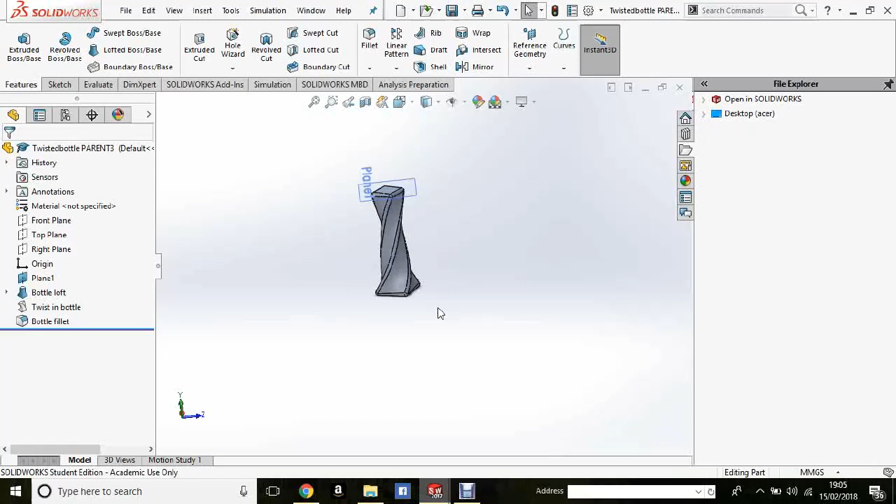Hello guys, and welcome to part 2 of the twisted bottle. So where we left off was lofting the whole bottle shape, twisting it with a flex, and then filleting all of the edges. So we're now going to move on to doming.

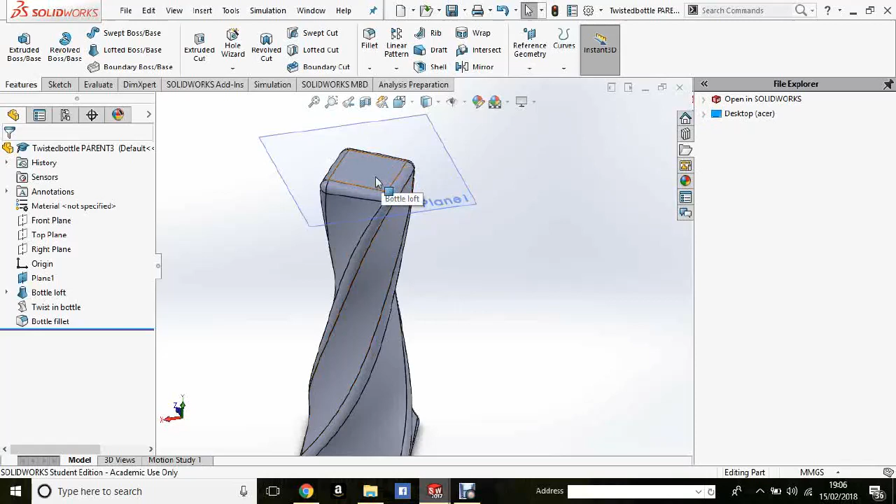This is another new feature that you guys will be learning. Doming is essentially in the features tool, but we'll have to insert it. So if we go insert, features, and dome. We can dome two ways. First of all, we need to select the parameters.

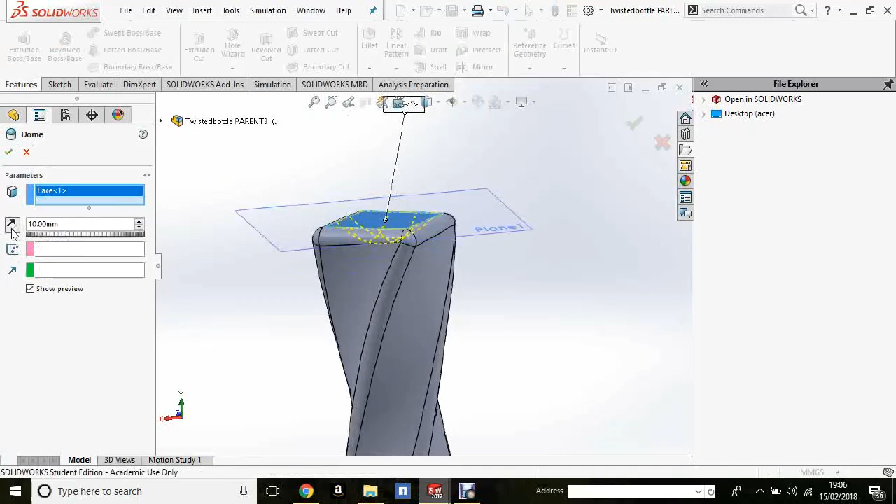As you can see, it's domed up, but if we click the reverse direction tool in here, it's domed inwards now, and that's what we want. So if we just mess around with this number, we can go 3, this is changing the depth here, so you can do 10 if you really want to, or 5, but I'll go 3 for this one.

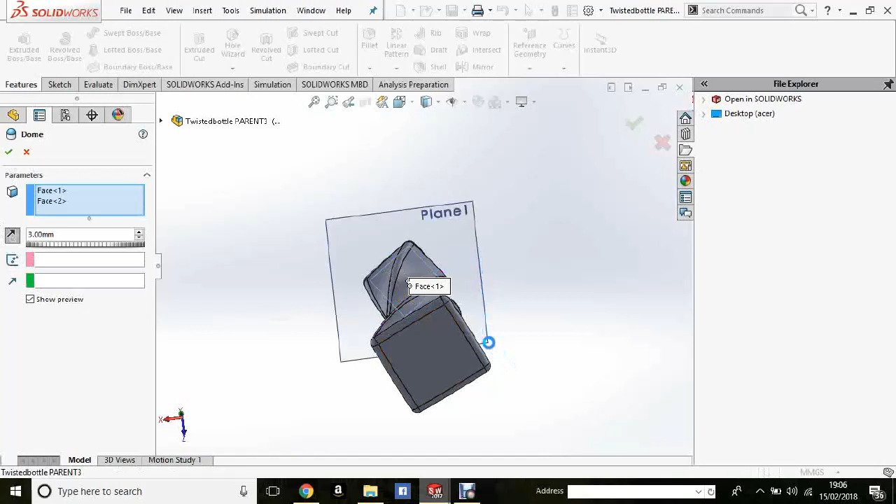You can most probably go with the bottom one as well, but it might be best to separate these as two different domes. So I'll just wait for Solidworks to figure it out. So yeah, I'll do it with both of them at the same time, but you can do it separately if you want to.

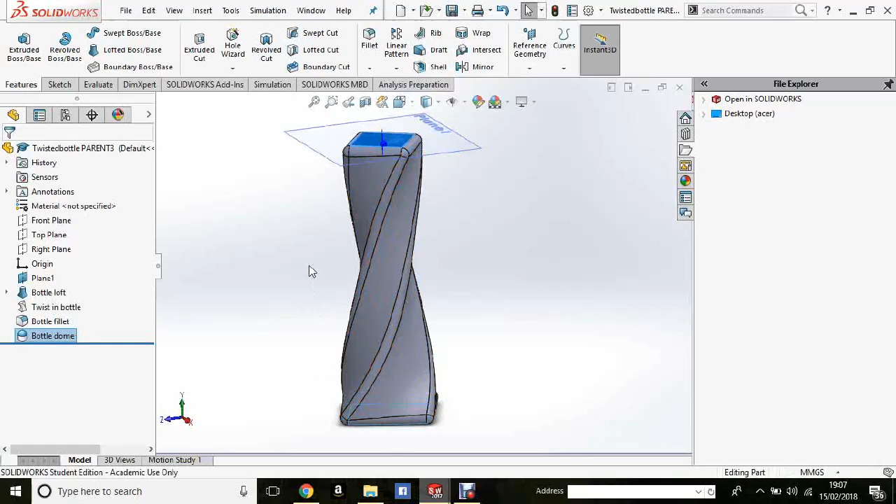If you click the green tick when you're happy, as you can see now, there is a slight change and they have domed inwards. So we'll just F2 that and go bottle dome. And we've domed the top and the bottom there.

So what we'll go ahead and do now is split the two parts. Splitting is basically making this whole part two different components. So we can edit this bottom part of the bottle and put a cut and fillets in the inside to make it look like there's liquid inside.

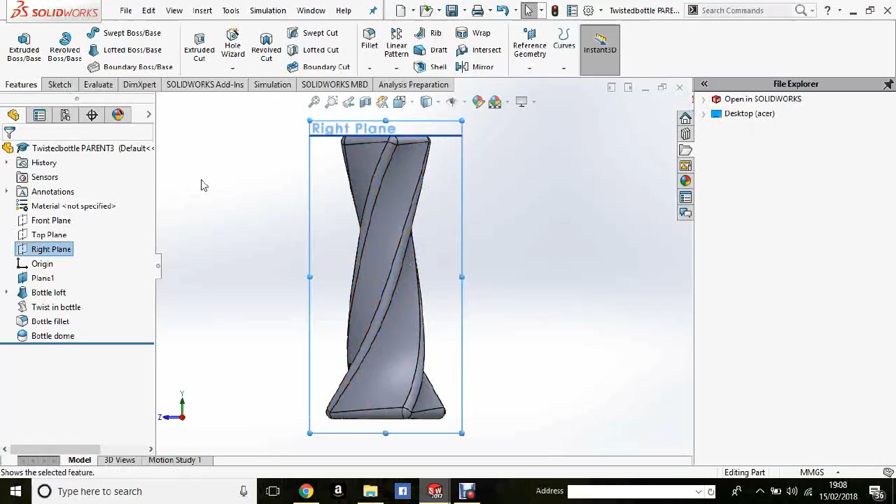So we'll go ahead and sketch on the either right or front plane. I'll do it on the right, spacebar normal to, and go ahead and sketch. All we want is a line, a straight horizontal line across the whole body, and you can make it something like 180 or 160 away. I would say 160 away from the origin. So there you go, that's fully defined there.

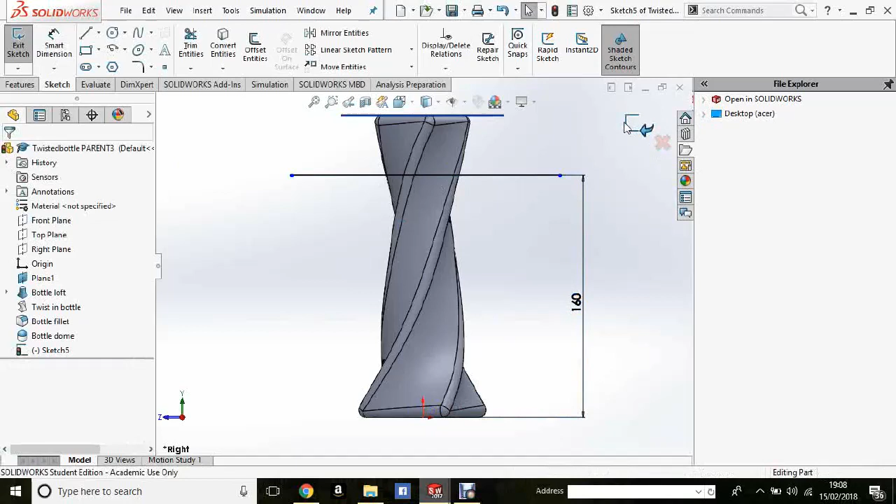So if we exit the sketch now, what we want to do is insert a split. So if we go insert, features, and split down there. First of all, we want to select the trim tool, and the trim tool is the sketch that we drew, so that line there. And what we want to do now is cut part.

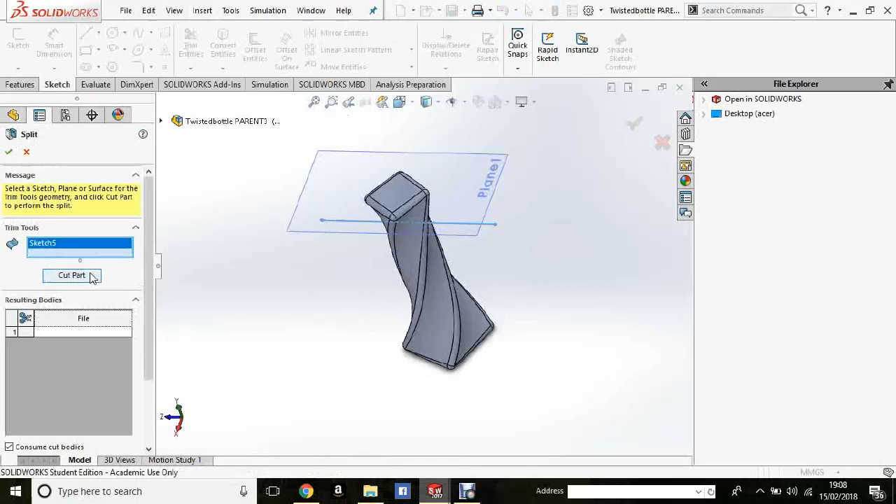So if we click cut part, it will pop up how many parts we have. We've got two bodies that it's selected now, and we'll save these as different ones, but make sure that consume cut bodies is highlighted or ticked, as we want to consume all of the bodies within this component. But later on, if you are making your own parts and don't want it consumed, then you can untick that.

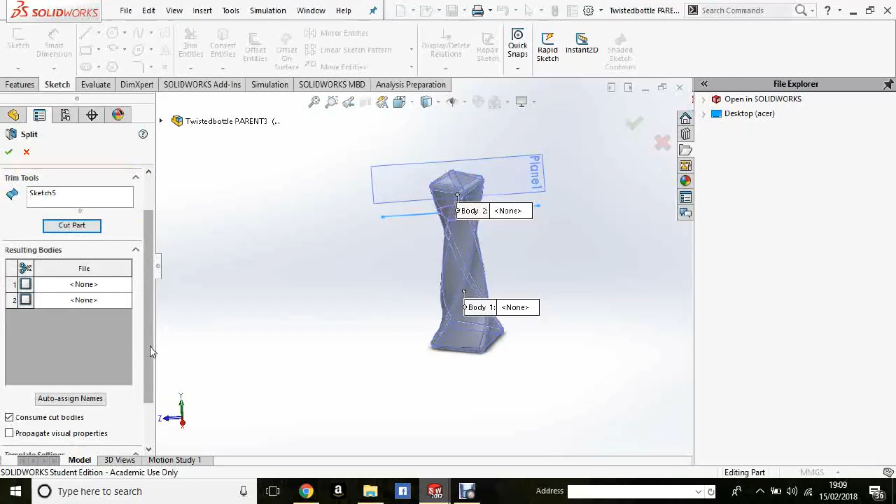So what we want to do is double click on one of the bodies and save it, as this will be the bottom, so bottom twisted bottle, and I'll call it 3.

And then we want to save the top part now as well. So if we go ahead and, oh, my cursor is gone, there we go. If we double click on that part there and go top, and there you go. So we can now click the tick as we've saved it all, once Solidworks decides to show my cursor.

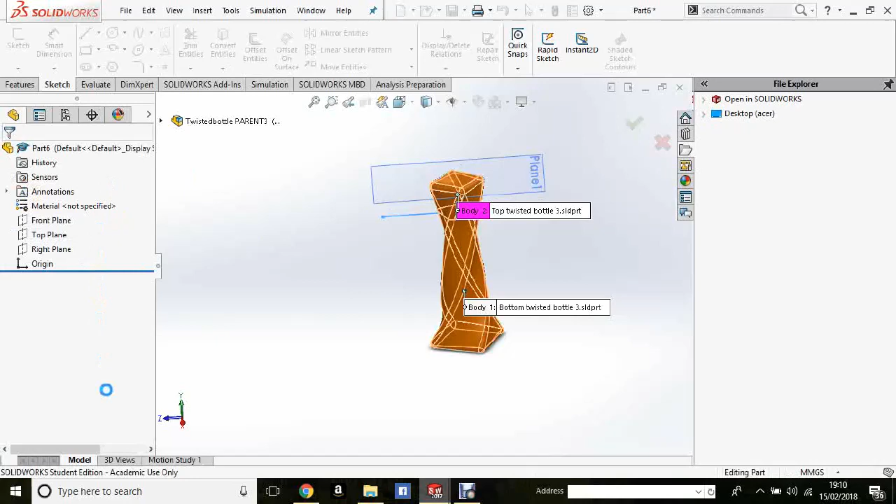Click the tick, and all of the bodies within this part should disappear. But you'll still see in your feature tree that you've got all of the features you made. Don't be alarmed, as this is meant to happen. We will later use both of these components and assemble them in an assembly.

As you can see, Solidworks is doing its thing, creating these parts, and I'll open them up in a second. So as you can see, they've now disappeared. I'll just rename that to bottle split. Now we will open the top part of the bottle, so I saved it as top twisted bottle 3.

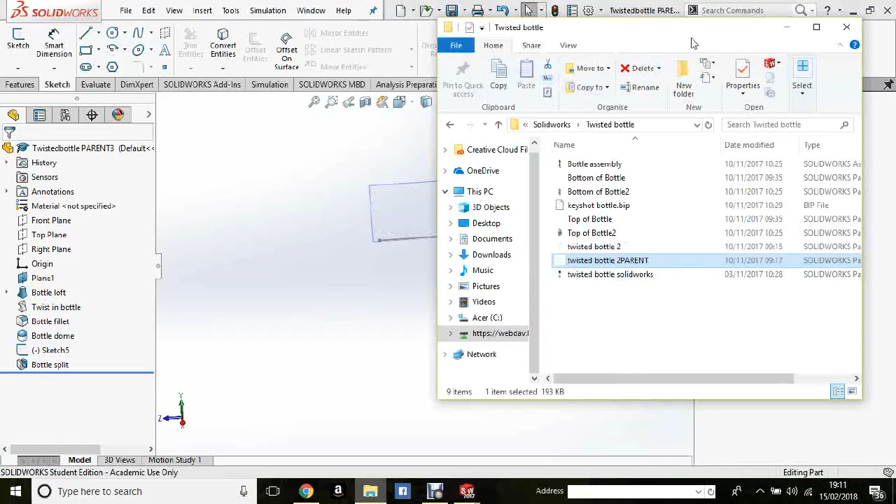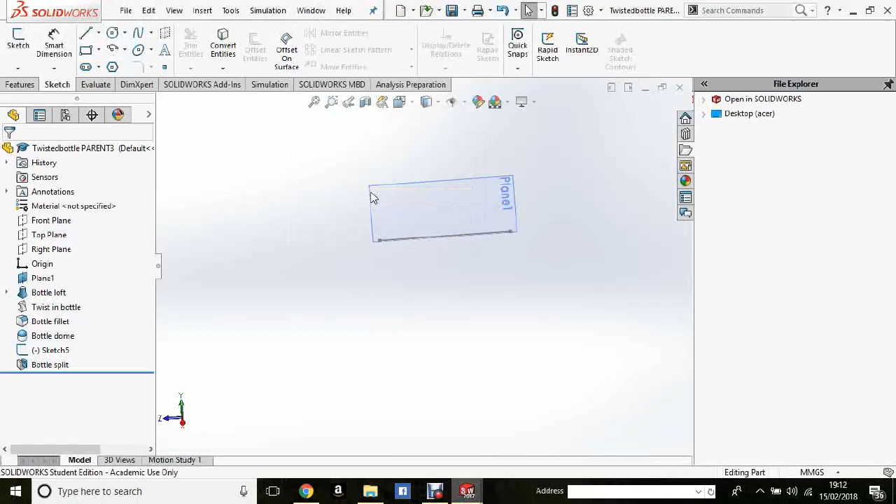Okay, my Solidworks is having an issue at the moment. It could be that one. There we go, so it should have opened now. I'll just get it up. So Solidworks does open these automatically. I did forget about that. So it should open these automatically.

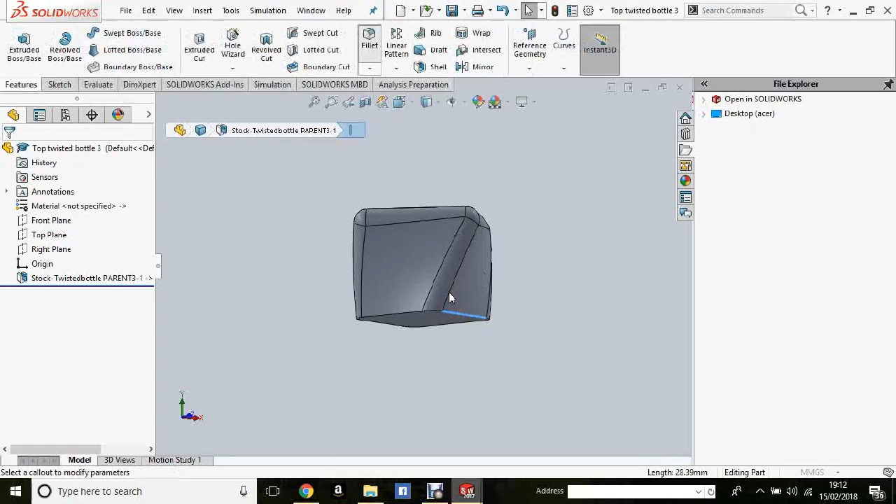So we've got our top part here, and all we need to do for the top part is go ahead and fillet at the bottom. So if we go onto features and fillet, I'm going to decrease that to about 3. You can put it to however you want, but I'd say 3 is one of the best fillets for that. And as you can see, it's done it.

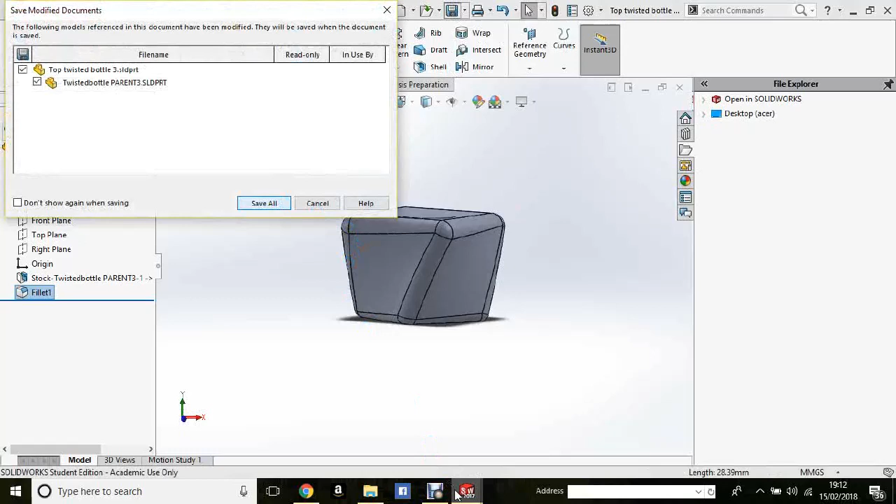So if you just save it, it will update it all, it will update the parent file as well. This is called a child file, made from the parent, and if you delete that parent file, the child file will break too. So you can delete these parts if needed, but definitely don't delete the parent, as they all derive back.

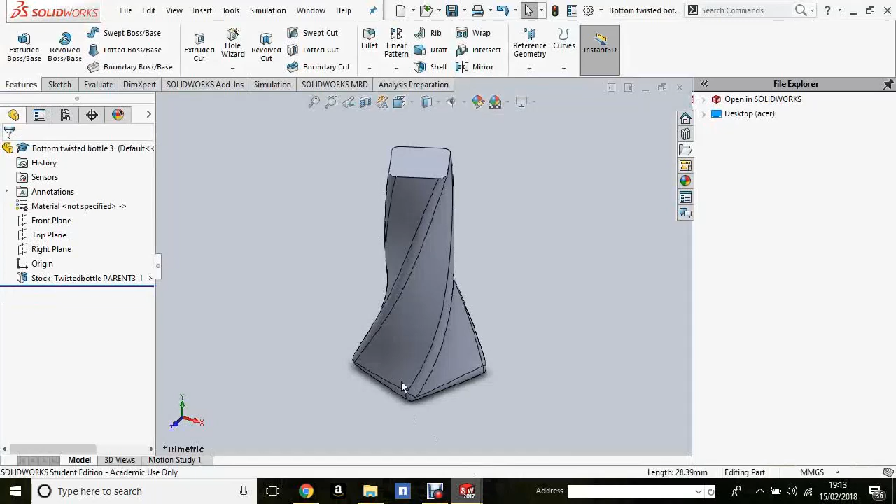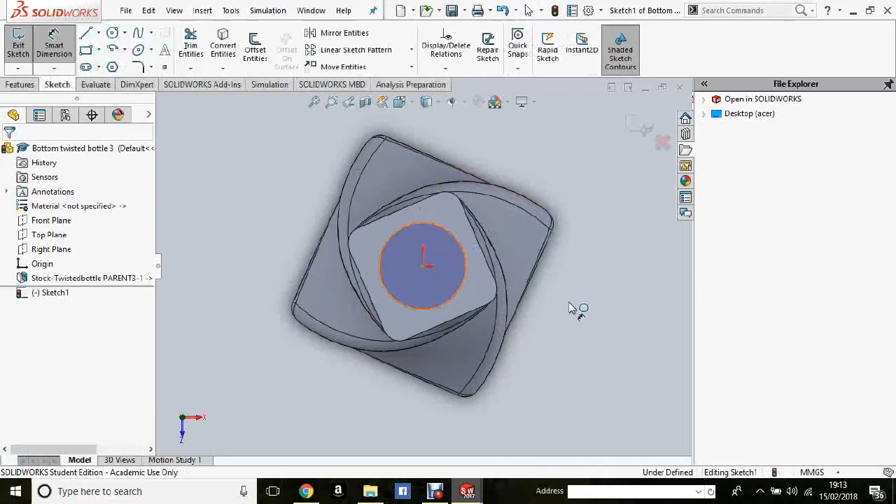So we'll open up the bottom part now, and what we want to do is sketch on this face here. If you select that face and click normal to, we're now going to sketch a circle on this face. We'll go ahead and go from the origin and make a circle, and then we'll dimension it. I'll make it about 30, actually 25, something like that. Don't make it too large.

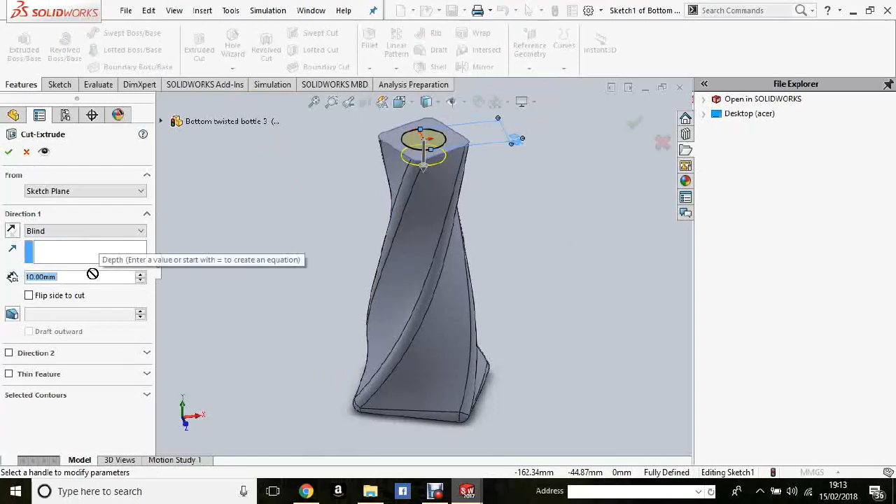And then we'll go features and extrude cut. Now we don't want this all the way through, so what we actually want is for it to go down quite a distance. So this is 180, so we'll make it about 140, and it will come up with a preview there. So if you're happy with the length, click the tick and it will update itself, and there you go, you've got your extrude cut there.

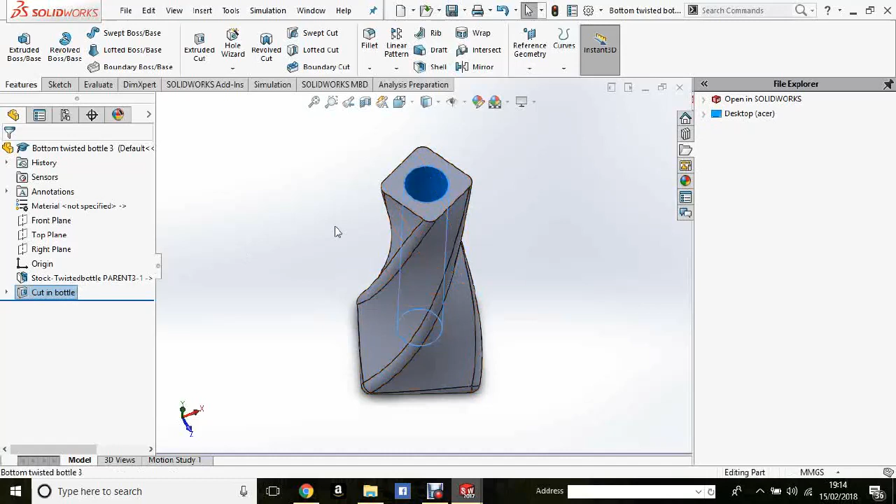If you just rename that to extrude cut, or cut in bottle, and we'll go ahead and make this a little bit tidier again with filleting.

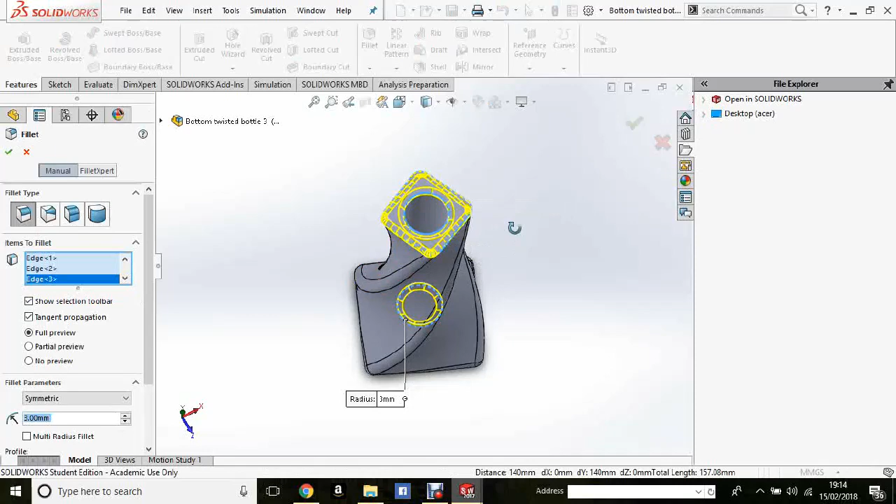So we'll go fillet. You can make all of the edges the same fillet if need be, so you can click inside here and go 3mm, and up here 3mm, but it might not necessarily work, so you can do it separately or together. Mine has worked quite nicely, so I'll do it all together, but if needs be, click on that edge, click the tick, and then go for another fillet on the other edges.

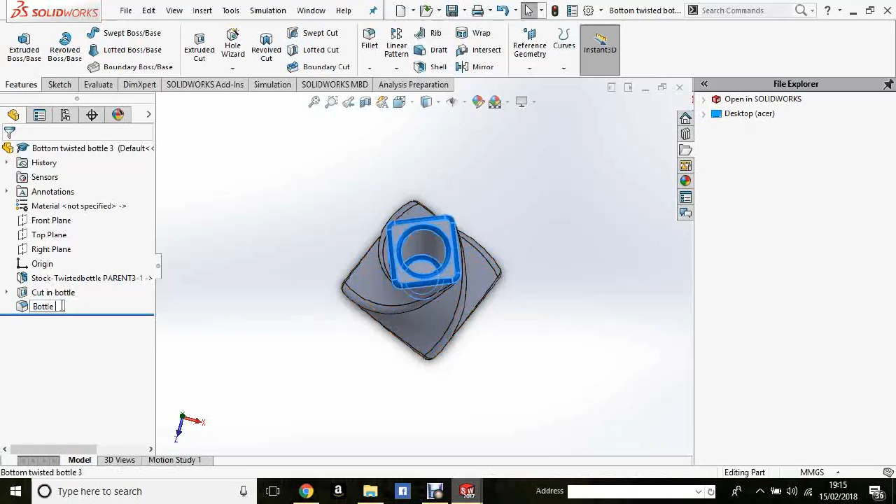So we've then got our fillet there, so I'll just rename the fillet to bottle fillet, and then save again.

So once we've done that, we've got the top and the bottom correct. We'll go ahead and assemble this in part 3 of the video. So I'll see you guys then.